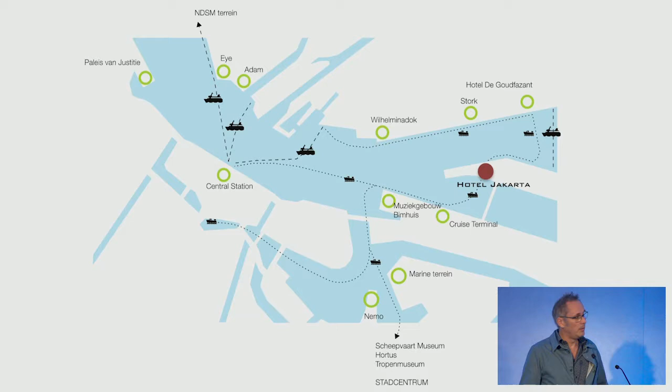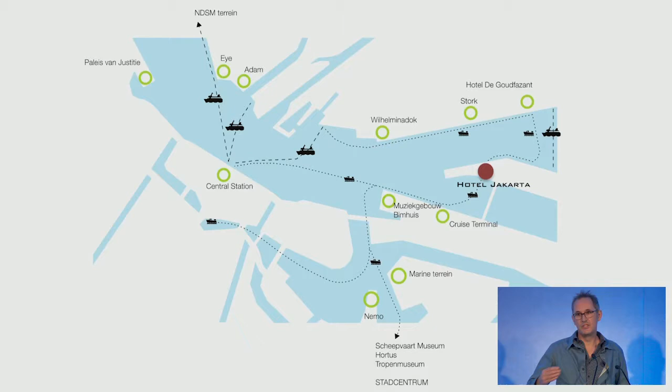WestCord only wants to have hotels that are on the waterfront, because they are big sailors, they like to sail, so they always want to approach their hotels by boat as well. So this is, in fact, the history of the place.

What we started with is sort of bringing in this ship form again, simply also because the plot was exactly outlined - what the envelope was exactly given. So you couldn't build less, and you're not allowed to build more. So you end up with this sort of ship form here as well.

The question was, what can you do on this plot? The best thing probably is to team up with the Hortus Botanicus, who has also a history of 400 years with Indonesia, and the Tropical Institute, the Tropical Museum, that also deals with a long history. So we teamed up with those partners, and we asked them to join us and come up with this proposal for WestCord Hotels.

What we got in the end was a team in a very early stage, starting up with, okay, what is a sustainable hotel, how can we deal with that? So the best thing was to come up with an idea of a prefabricated wood module that we could stack up to the limited height that we had here. Within about 5 to 6 weeks, we made this concept, and what in fact has never happened to us is that it didn't change at all in the coming 5 years that we engineered all of this.

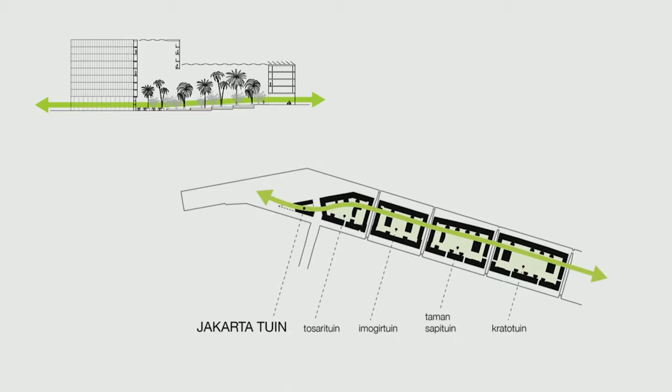And we tried to connect even the 4 gardens that you already have, the 4 inner gardens of the building blocks. We added, let's say, the 5th garden, which is now the subtropical garden of our Hotel Jakarta. So this completely open ground floor connects on all different levels - near the bridge, halfway the bridge, and also on the lower lying quay - to the neighborhood, for everybody, not just for tourists.

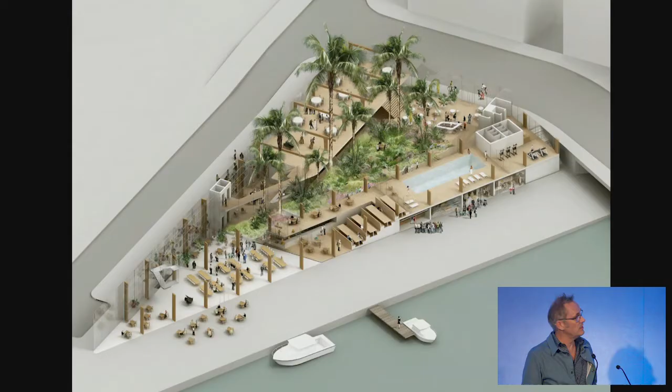As you see here, this is in fact what we came up with during that tender, and this is also what we built. So you see from the swimming pool, you go to the wellness, bakery, banqueting hall, in the middle of the subtropical garden, and then the restaurants and bars in the tip of the block.

Interesting thing is that if you work like this and you have those partners, you know you're going to build in wood, a circular building, built with 2,300 cubic meters of CLT and finishing off with about 1,200 cubic meters of bamboo for floors, ceilings, walls, etc. Dealing with that brings you a completely different building and a completely different way of working that we've really embraced and like to continue in future projects.

In the end, I think the project has come out much better than we expected in the beginning. We thought we'd have to compromise on those elements, but we've been extremely lucky that the client also went through the whole process and said, okay, I'm going to do this extra thing.

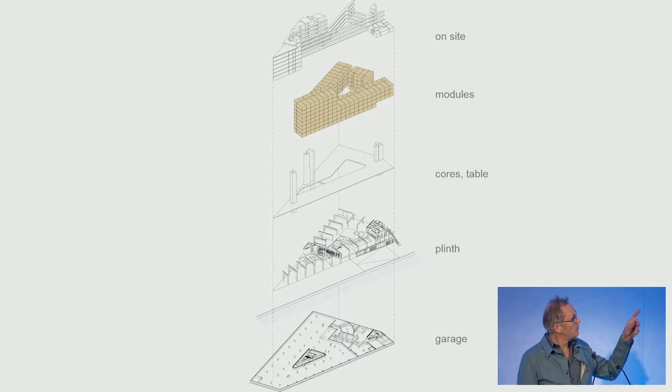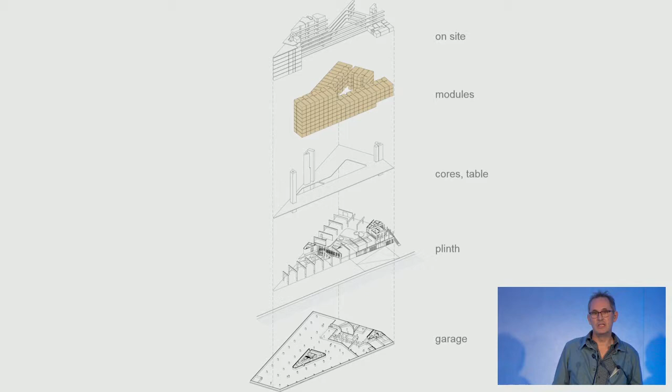Complemented by 174 identical wooden units, 2 types of rooms, and then we had to add the last 26 that are built in situ because in the sharp tip and on the corners we were not able to use those prefab elements. So it's quite amazing to see that the traditional way of building took us about a year on site, and then finishing it with the 174 rooms took us about 18 days on site. There's also a completely different way of the whole building site and sound, CO2 pollution, all those things.

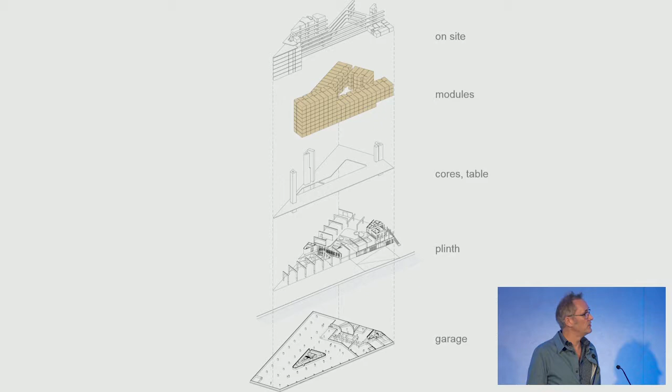This is the element that we engineered together with a structural engineer. There's a lot to do with, of course, fireproofing and things like that. It has triple glazing, so it's like a passive module, and that was brought in all fixed, stacked up, and then we just had to cover it with one skin for wind and waterproofing, which is the 4th layer. So it's a quadruple glazing in the very end.

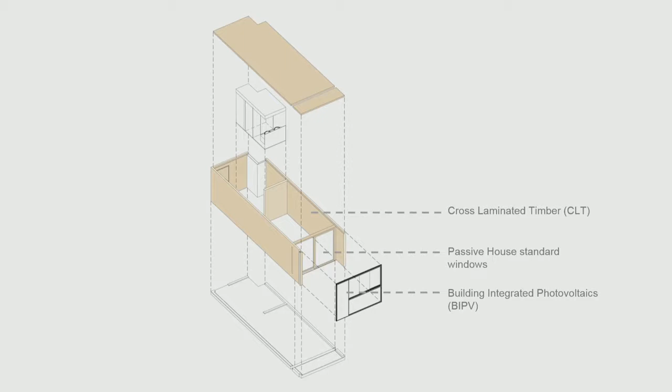Rooms, since it is a prefab module, which is normally a product seen as being cheap, being temporary - we said if we're going to do this, it has to be better than traditional building, not less. So we used a special CLT timber structure with the structural planks built from Weisstanne, which is a very nice pine. We used a very thin concrete floor for the fireproofing between the units, and all of that was stacked without any additional structure. So the wood walls bring it up to 30 meters, whereas the first 6 meters is the table structure that it's built on.

So here you see the rooms. And we, in the end, were very happy that this last skin, which is the 4th layer of glass with the PV cells, is completely energy neutral now, 1,700 square meters of PV. The last layer of glass is completely transparent, has no coatings, and therefore the wood structure is also very much visible from the outside, which is normally not the case if you build with this fully coated triple glazing. It's too much to explain all of this, but this is, let's say, the whole holistic idea of building and of energy savings.

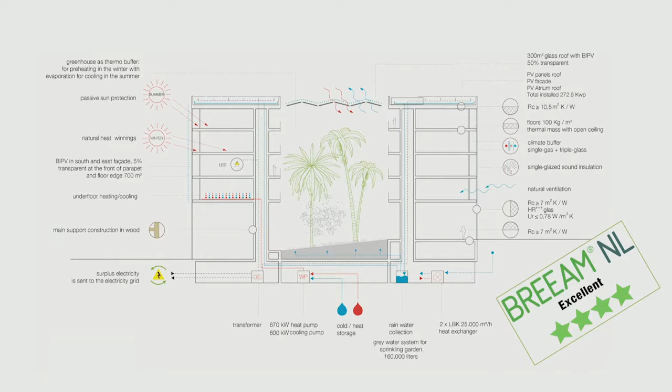This is the technical layer. The last 2 meters is completely full of the whole PV installations, etc. I think I'm done, more or less.